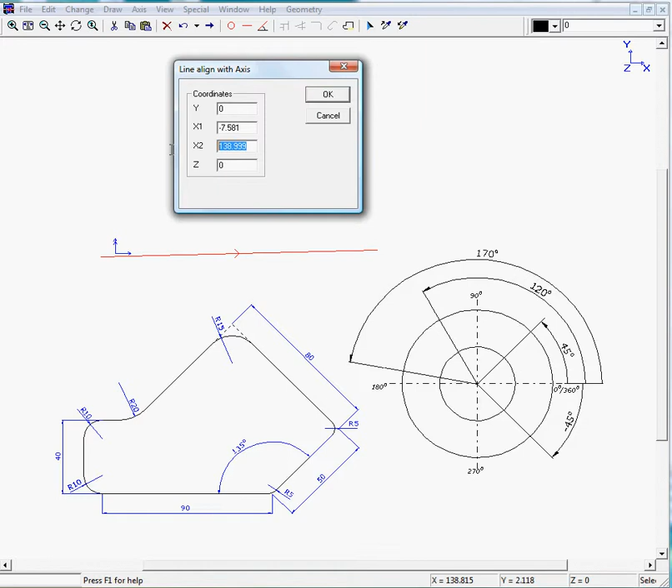In this case, take into account that you need to know the endpoint to the reference point, because this line has a length of 90. So on the x2 value we will enter 90 and we'll click on OK.

Now we will draw up this line with an angle, so we move to the angle function, line angle, and you will see you can enter a few values. Please take a look at this part. As you can see, this line will be a line of 45 degrees if you look at this drawing, where 0 degrees is right here, 90 is up there, 180, 270.

So in this case we need to define this line, which would mean that it would point in this direction, so it would always lie between 0 and 90 degrees. As this is 135 degrees, we can enter an angle of 180 minus 135, which gives you an angle of 45 degrees, and the length is 50.

The value of angle with z-axis is 90. If you draw in 2D only, never ever change this value. So we can now click on OK, and we see our line of 45 degrees. We can move on to this line. Again, we will use the line angle function.

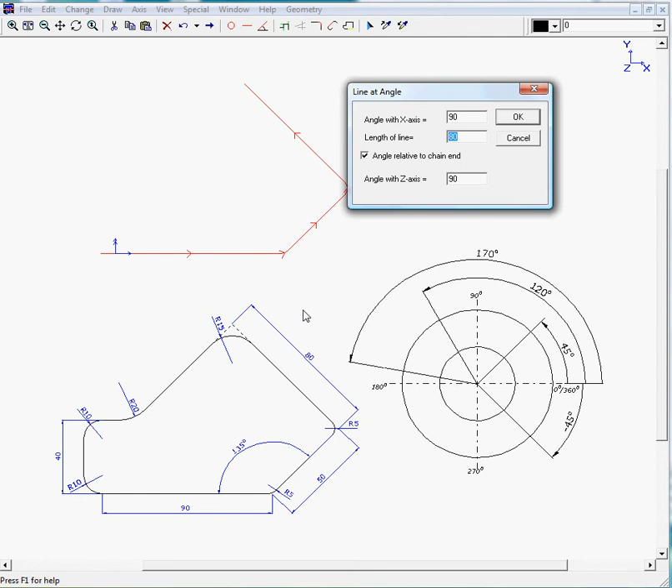The length of the line is not known, so we can estimate a value, like for example 80, and we get this line down, which would be the same as 225 degrees. We can fillet this with 15, and we move on to the horizontal line with the y value of 40.

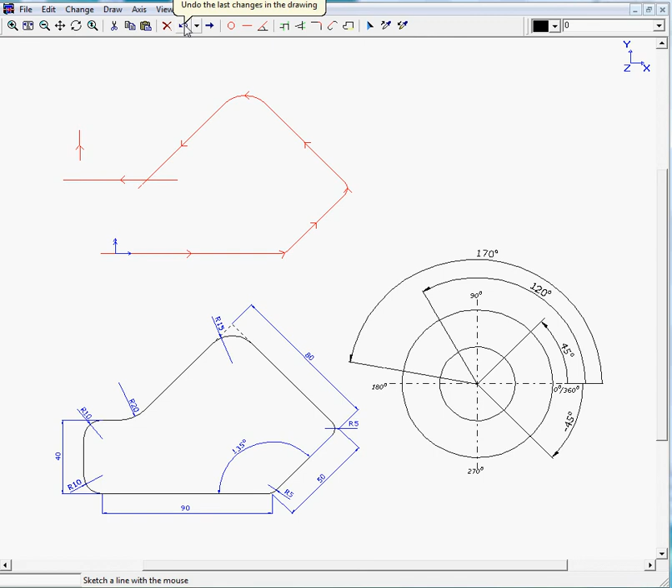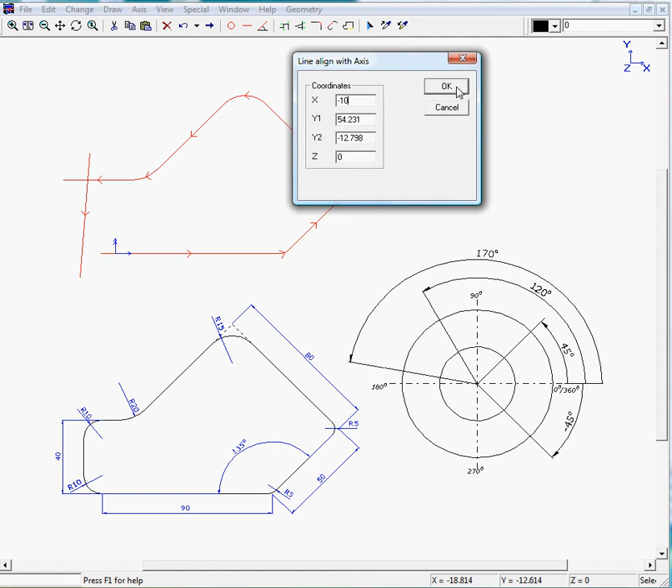OK, and the line, no, we cancel, we move back one step and first fillet this corner with 20, and activate the sketch line function again and enter a value of, as this is 0, it would mean that this line would lie on x minus 10, as this is a fillet of 10, so we enter minus 10. OK. We can then fillet this corner with a radius of 10.

OK. And now we need to fillet the last element with the first element, which would mean we activate closed chain, we move to fillet. As you can see, this is automatically activated, and we click on 10, and our chain is ready.

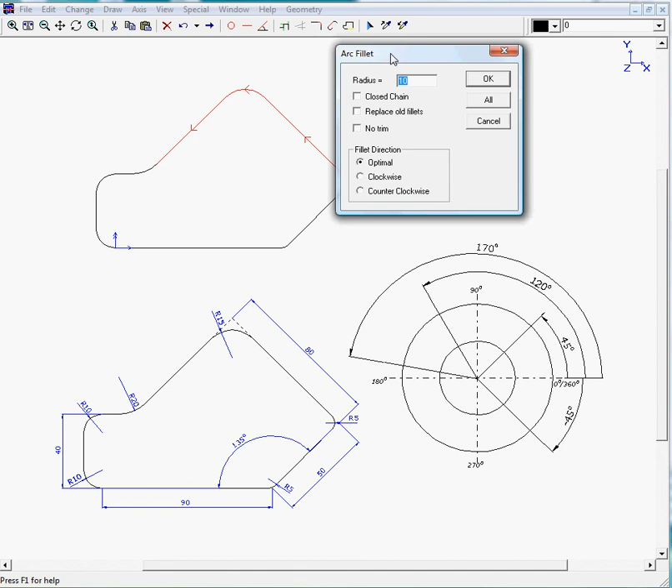So now if, for example, you would like to change this fillet of 15 into 12, what you can do is select this line, this arc, and this line. Tensor will now recognize this as a corner with a fillet. So if we move to radius and we enter 12, and we would activate replace old fillets, it would change the recognizable fillet into 12.

So we click on OK, and it's now being altered to 12. As you can see, radius is 12. This was exercise 4. Please move on to exercise 5.